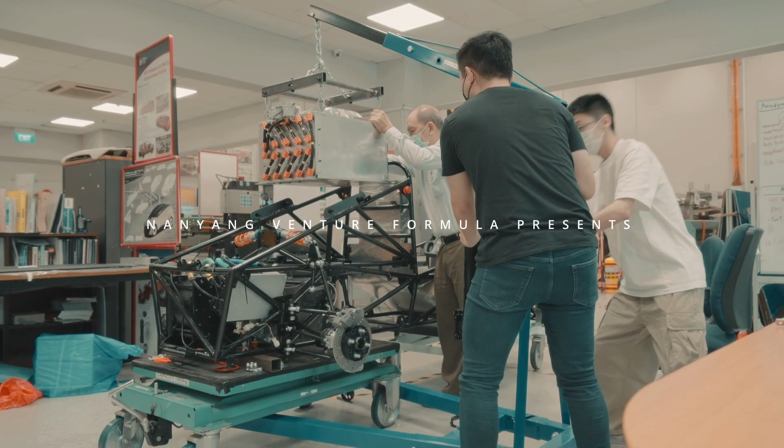Hi, I'm Jonathan, and I'm in charge of developing the energy system for the Nanyang Venture Formula car. My job is to design an energy system to power up the NVF car, and we do this by designing a battery pack, also known as an accumulator.

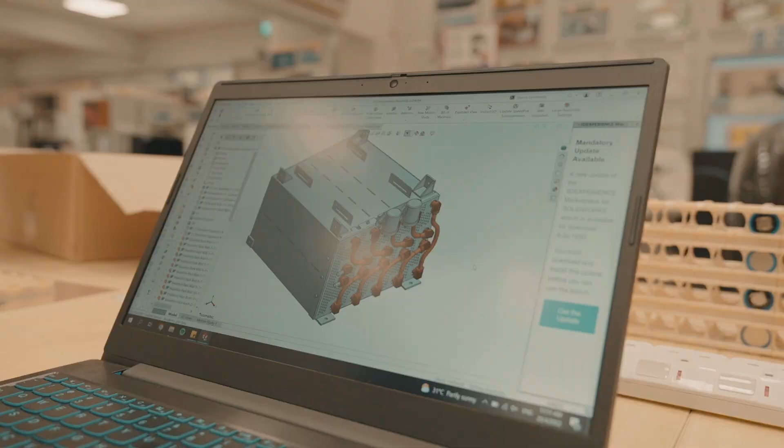Most teams choose to purchase an off-the-shelf solution, but by doing so, it will compromise on the flexibility of the system, having to tweak the system according to the solution bought. Hence, we decided to build our own so as to customize to our own needs.

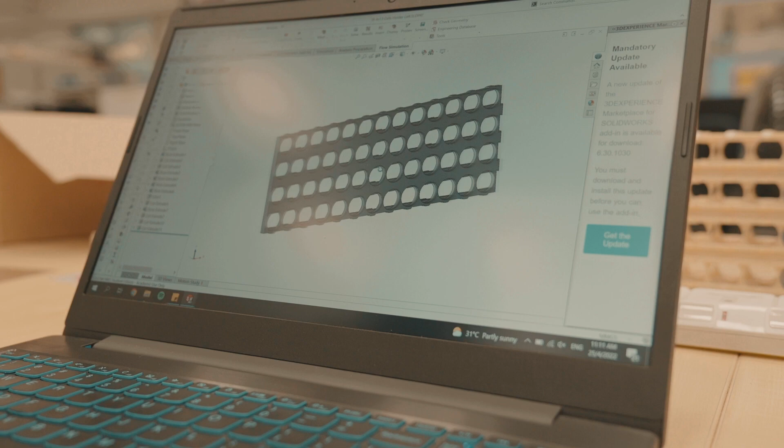Firstly, we must select the right type of battery cells and ensure there's enough energy capacity to power up our 100-volt motor. In this case, we've chosen the lithium iron phosphate 26650 cell. This is a high performance and capacity rechargeable battery, which can provide excellent power for high drain devices.

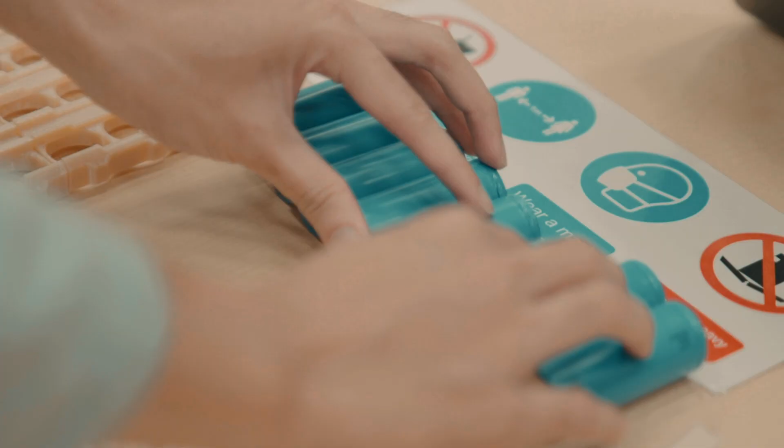Next, we put together 640 of them to make up an accumulator. We have to arrange them in such a way whereby the configuration maximizes efficiency and space. Hence, we arranged them in 10 segments of 4 series and 16 parallel, so as to provide an energy capacity of around 6 kWh. Putting it into comparison with our daily lives, we can power up your aircon for a good 10 hours.

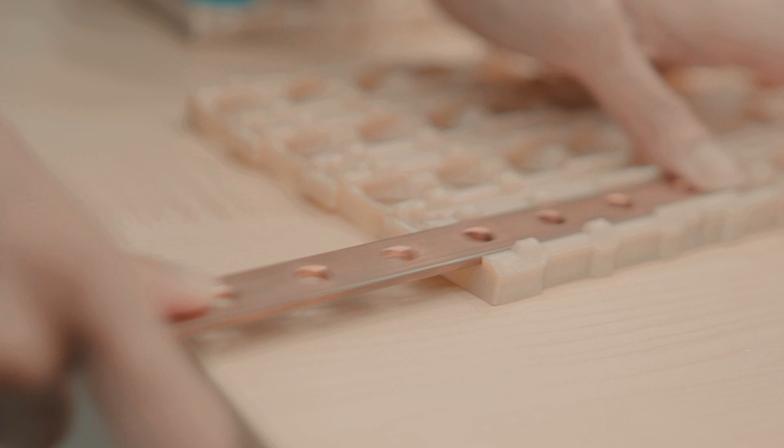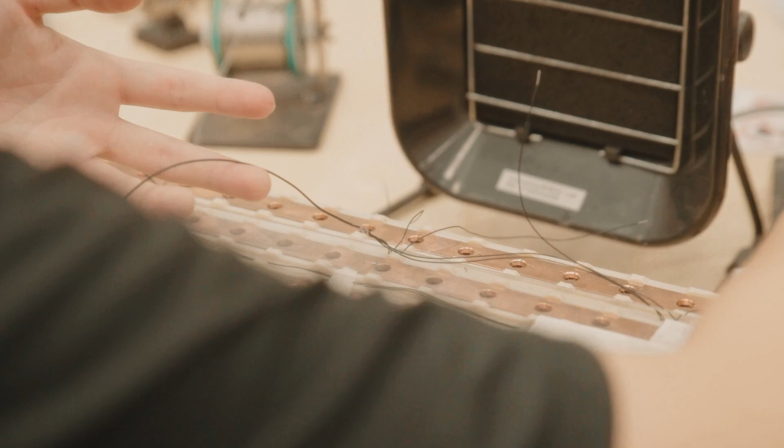With a high capacity battery pack, there might be an issue of current overload, which damages the accumulator or even causes fire in some situations. Hence, to prevent such a situation from happening, we included a piece of thin copper wire in each battery cell. This thin copper wire functions as a fusible link which will melt and disconnect the cell from the accumulator in the event of excessive current, functioning as a sacrificial device to protect the more important components of our accumulator.

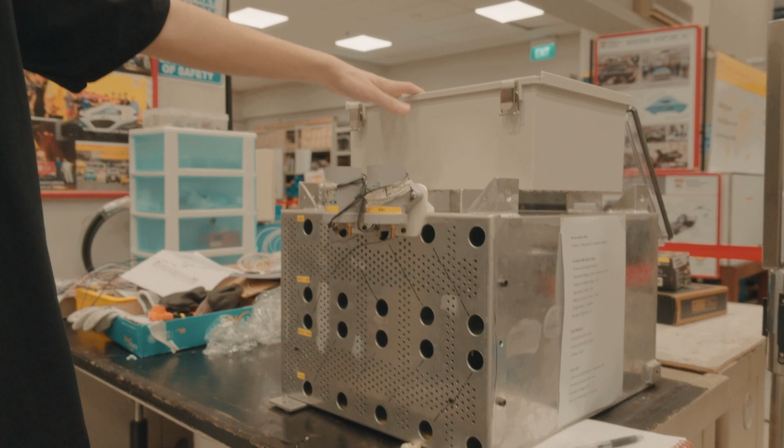10 modules will go into here. Each module will have the wires coming out. We'll be putting them into this box. Inside there's the battery management system, and if there's anything wrong with the battery, then it will cut it off.

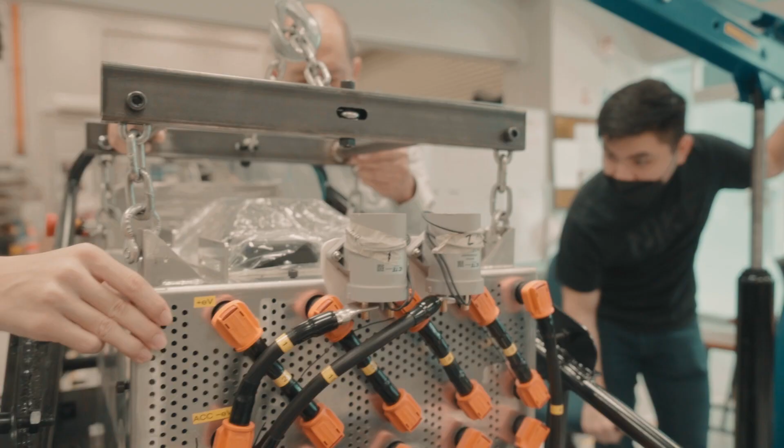Moving forward, since this is the heaviest component of the car, weighing around 100 kg, it is possible that in the future we can look at smaller and more efficient cells, improving capacity and efficiency on the whole.

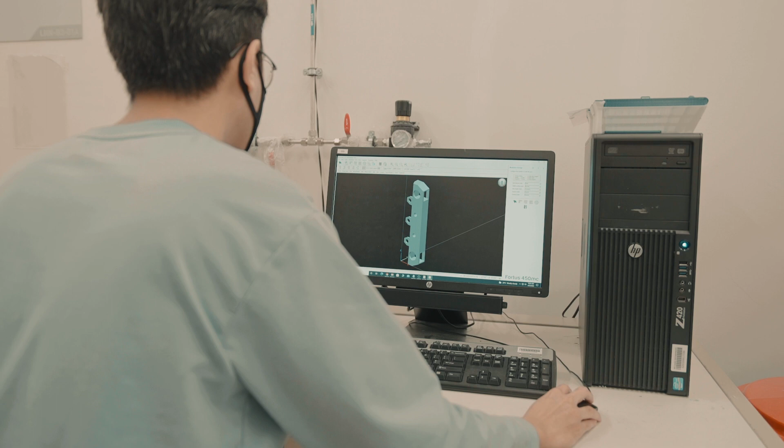Hi, my name is Adli and I am part of the MVF team. I'm in charge of the design of the accumulator box. A lot of the electrical components were already chosen by the electrical team, such as these lithium ion cells. So what I had to do was design the mechanical side of the accumulator, which is the casing, the arrangement of these cells, and how the accumulator is mounted to the chassis.

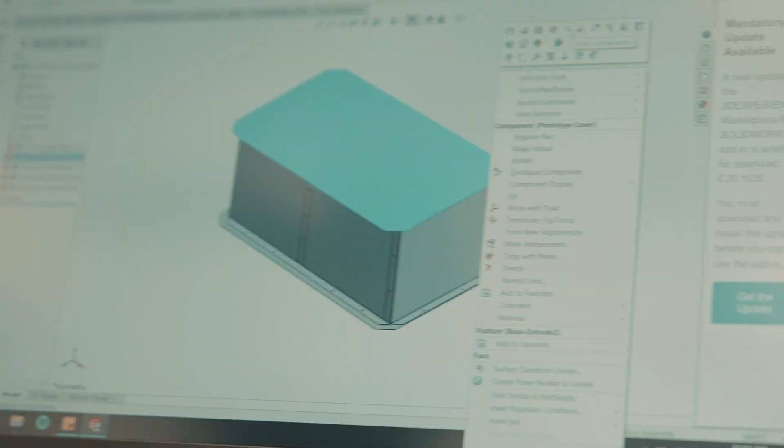Before I joined the team, there were already a few rough designs, and from those designs I worked on them further. Through weeks and weeks of discussing with Prof and other team members, we managed to come up with the existing design we have now.

So the accumulator is made up of 640 lithium ion cells, separated into 10 modules, and each of these modules is held by 3D printed cell holders.

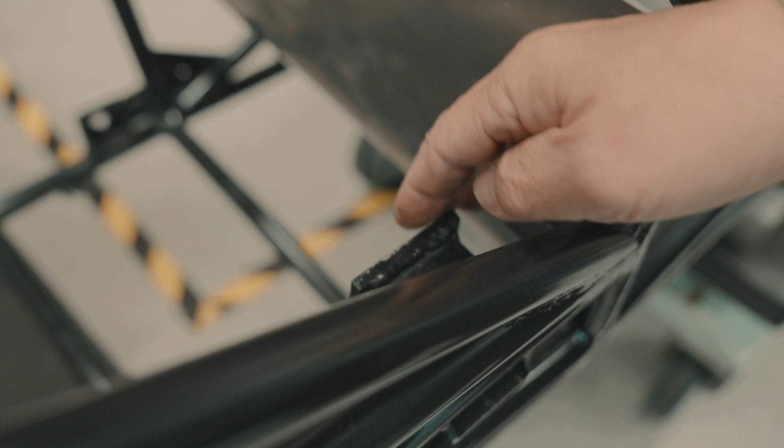One major problem we had throughout the whole iteration was that the size of the accumulator was too big. The support pad here is crashing into this, on both sides, because this distance is narrower than that. So we have to either shave a bit off or machine a bit off to allow it to pass through. When it passes through, it will land here.

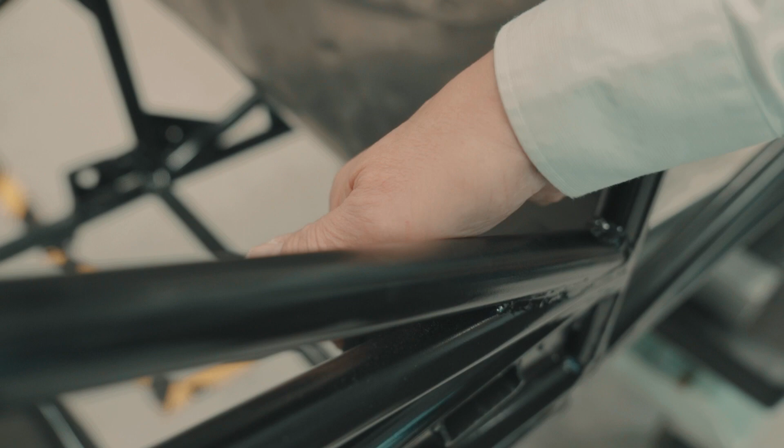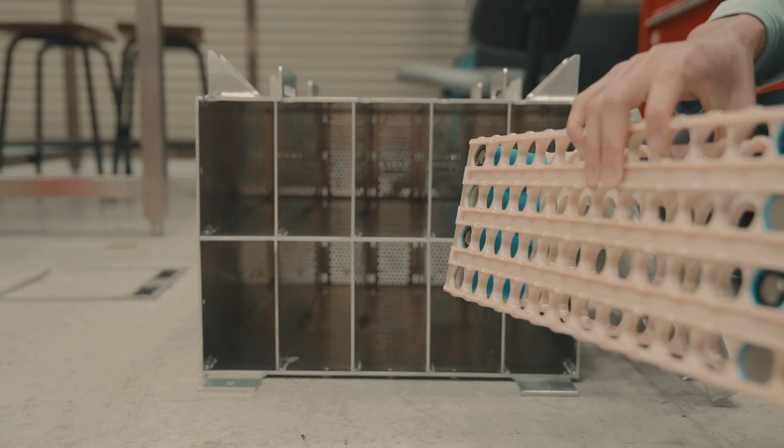So the size of the outer casing is mainly dependent on how these cells are arranged inside them. I remember there were a few early iterations where the accumulator was too big to fit inside the chassis, so we had to change the chassis and the arrangement of these cells to get better dimensions that could fit the chassis.

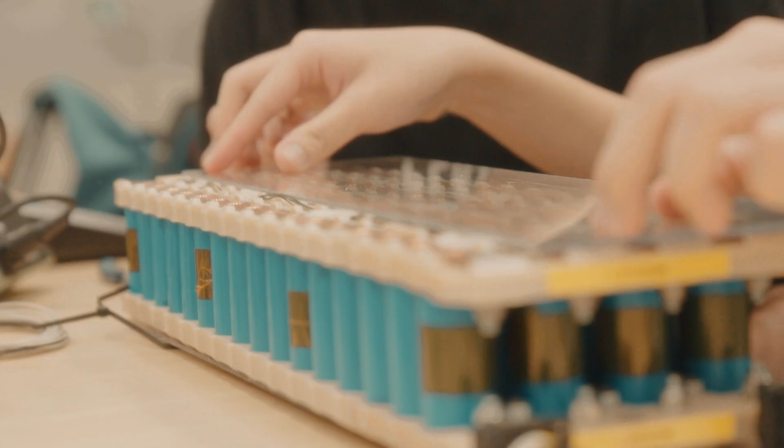An improvement that can be made is the 3D printed cell holders. I think there might be better ways to hold the cells and components together while using less material to print, because this material is made of Ultem 9085, which is quite expensive, and it's only one of the few 3D printing materials that is compliant to the rules.